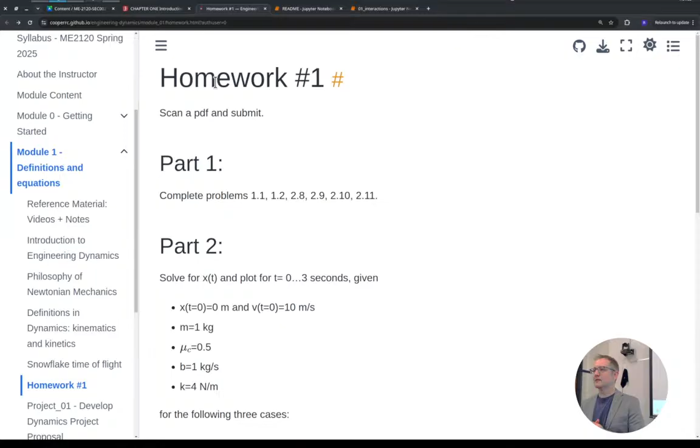Cool, ready for chapter 1, problem 1? Or are there still other questions? No, we're good? All right, we'll jump right in.

In the syllabus, and even in the reference material and readings, there's always a link to the chapters we're using. In this case we have chapter 1, chapter 2, and if you follow that link, since we're here on UConn campus, it'll jump you right into a PDF version of the textbook. So I'll scroll - I'm going to skip over the reading part and jump right into problem 1.

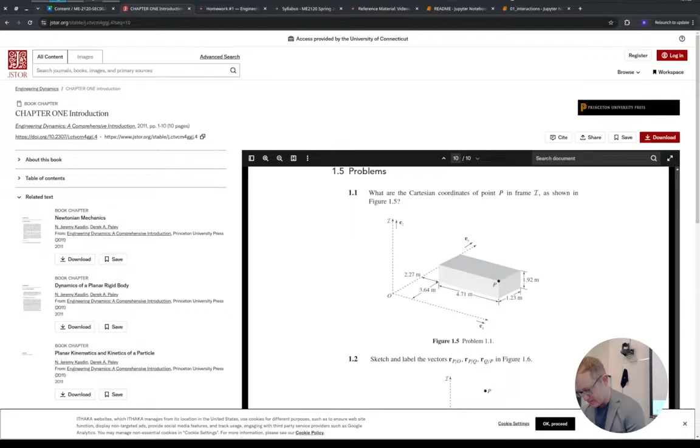I'll leave this kind of big. So in this problem, we have a coordinate system labeled for us, and there's a box sitting on that EX, EY floor, and we want to figure out where point P is. What kind of problem is this? It seems kind of static, right? It doesn't seem like a dynamics problem. So what are we doing here?

Seems like some geometric problem. Yeah, we're using geometry to describe locations and positions. So that general process is called kinematics. Here we're trying to define the kinematics of this point P.

And there could be cases where it's the same exact problem, but now the box is rotating. So we want to track point P, and we know where it is to begin with, but now it's spinning, so where is it now? At a different point in time, where did it go? So that's our first step: where is point P? How do we describe where that is?

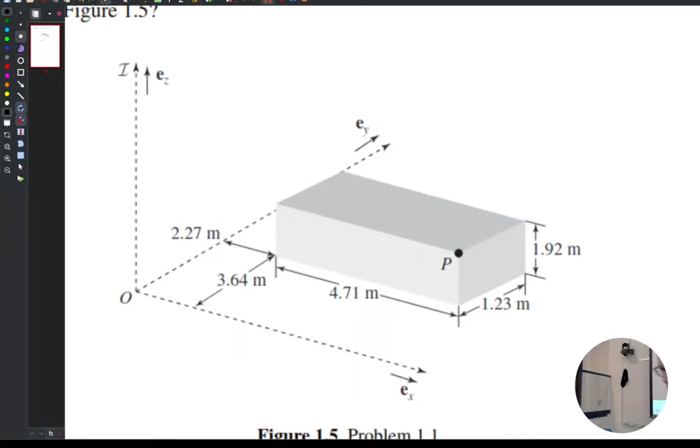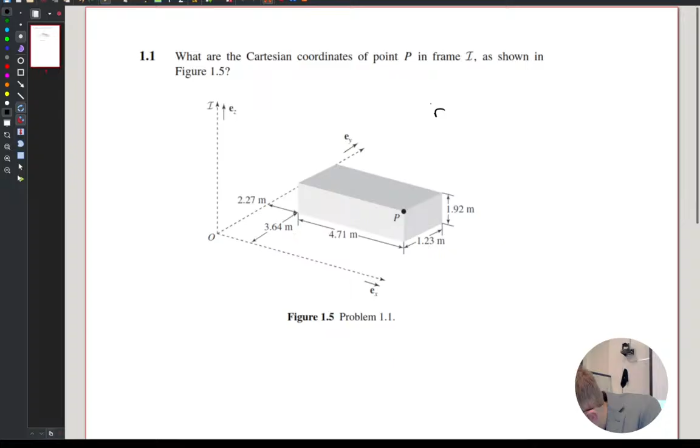All right, so most of the things that I've seen are kind of like something like this. What is that? 6.98. Saying that position P is these three coordinates, something like that.

Yeah. But also, we could say... have you seen this before, where you have like magnitude and unit vector added up like that? A little, some ringing a bell a little bit.

Are they different? Are these describing different positions of point P? No, it's the same. The vector is the vector. Once we say we're starting here, going to here, saying RP slash, really it's P slash O. So if you're saying RP, hopefully there's only one origin that you're talking about. So I'm going to write out explicitly that it's P slash O.

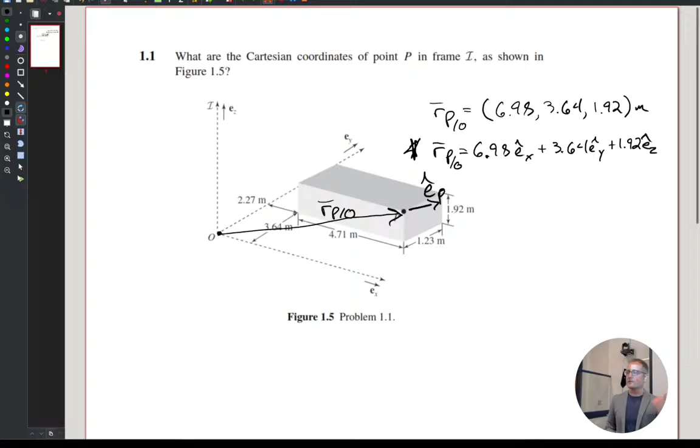We could figure out what this, I'll call it EP. There's a unit vector that points along that EP, right? We could take the magnitude, like its total distance from origin to point P, sum up all the squares, take the square root, divide all the points, and now we have a unit vector describing direction. And I could say RP slash O is this distance R along EP. It's still the same vector, just describing it along a different unit vector.

So that's the one thing I want to encourage you to try out: using that kind of notation more often, explicitly saying it's this unit vector times this magnitude plus that one times this magnitude. It helps organize where everything is pointing. Especially as things start rotating and moving, it gets easier to keep track of things.

Does that make sense? Was there a different approach? These were just the two things that I saw, it was like either parenthesis or something. I've also seen either brackets, like X, Y, and Z, or X, Y, Z, something like that. All of these are fine, but it helps to write out what coordinate system you're working in.

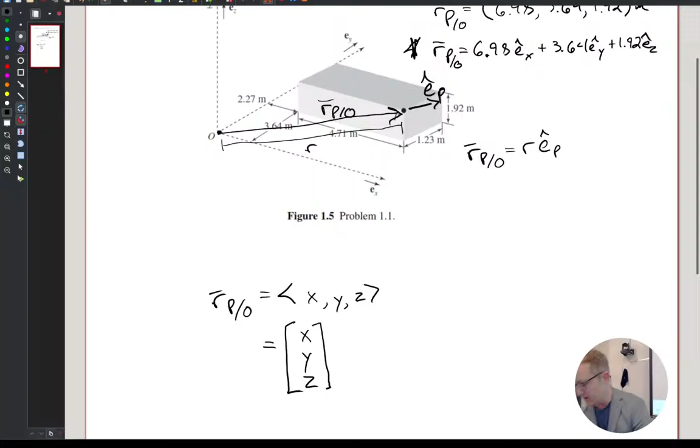And then even here, I would write out, hey, this is coordinate system I. So if I'm moving on the X direction, it's X along that I coordinate frame. Nothing mind-blowing yet, not yet.

So we just did our first kinematics problem. It's pretty exciting.

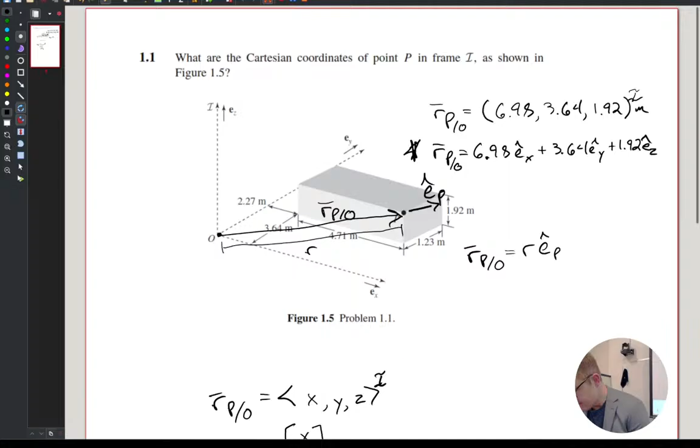Then I think, yeah, next one down here. Oh, not this one.

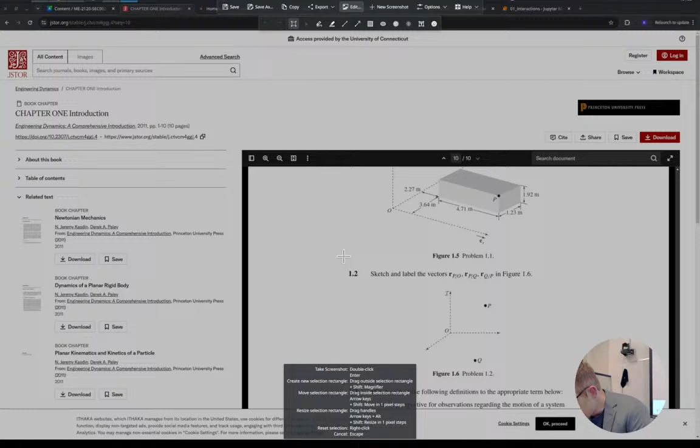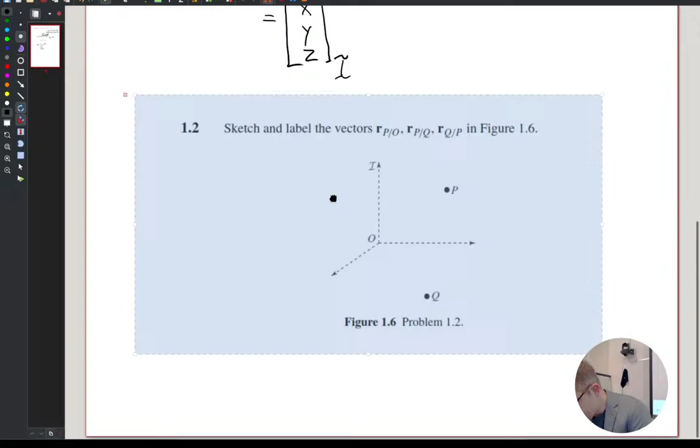So we want RPO, RPQ, and RQP. What do you think these are? What do those look like? And here we're trying to draw little arrows to represent what RPO, RQP are.

This one has all the right concept, but just the negatives. So the way to read it is the position of Q with respect to P. Yeah, exactly.

Okay, and you're doing this one's kind of like mathematics and geometry. If you have OP like that, which one of those vectors? Oh, I guess you do PO. Okay.

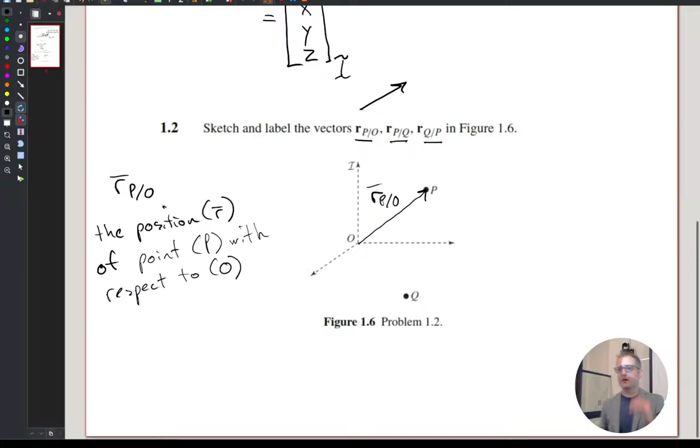the position R of point P with respect to O. That's what this notation means, and yeah, mathematicians and physicists love to condense everything to the point where it's almost unreadable, but that's what this quick notation means: I'm looking at where is point P with respect to point O.

So you write where you went and then where you came from. All right, cool. So then we probably have, let's do a blue. Probably have a good handle on this.

Which one is red, the P/Q or Q/P? What do we think? Who says the red arrow is P/Q? Yeah. P/Q. Yeah, it has to, it takes a little bit to readjust. All right, R of P/Q.

Cool, so then the other one has got to be Q/P, right? At least I would think so.

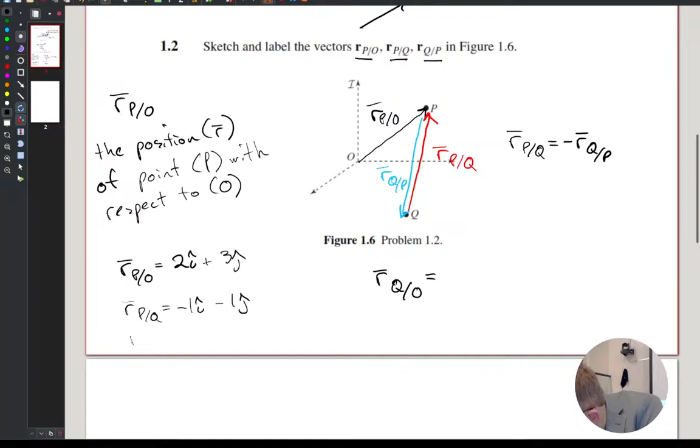RP/Q is negative 1i minus 1j. Let's say I know those 3 vectors, like I have the values, I measured them. Is there any way for me to figure out what RQO is? What is RQO? And here I simplified everything down to 2 dimensions, it's easier for me to work that way. What is RQO? Is it related to PO or PQ or QP, any of those?

You find the coordinates of Q from P, and then do that from P to Q. Okay, so what would that one look like?

Let's draw. So in this case, I go 1, 2, 1, 2, 3. P with respect to Q, so Q to P. So 1 and 1.

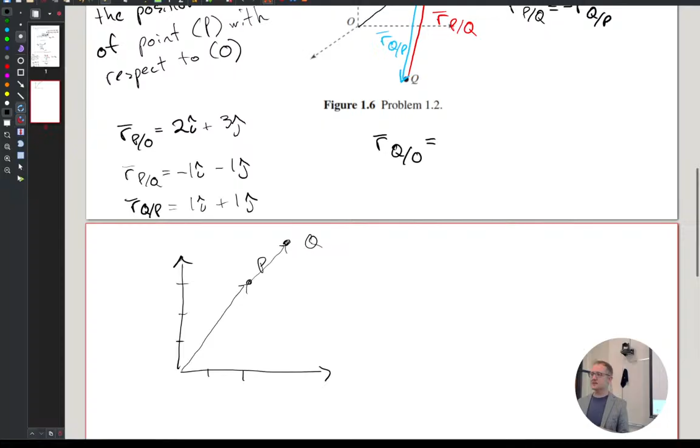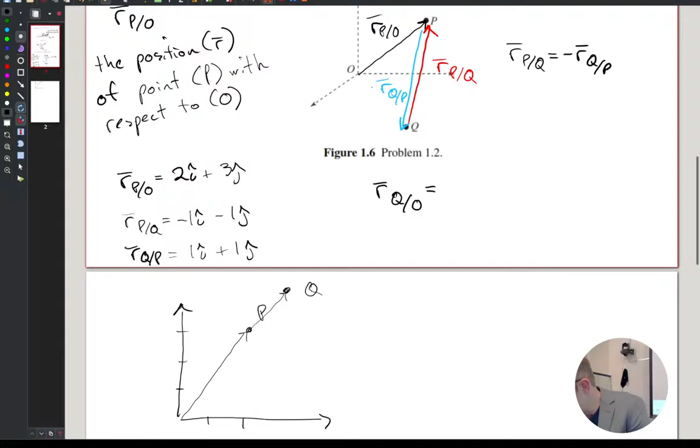Distance, yeah, if we want total distance. And this was what I was wondering if you've seen or used before, but if I already have these vectors, I can go tip to tail and add them up to get to that other vector. So this R of Q to O is R of P to O plus R of Q with respect to P.

So in this case, I could say that R, in this little made up example, R of Q to O is 2i plus 3j plus 1i plus 1j.

And they're all magnitudes and unit vectors. I can add unit vectors to each other and it's still the same unit vector. So in this case, I would have R of Q to O equals 3i plus 4j, something like that. But if I'm adding vectors up, I can add the magnitudes along the same direction. That's what I was trying to get at there.

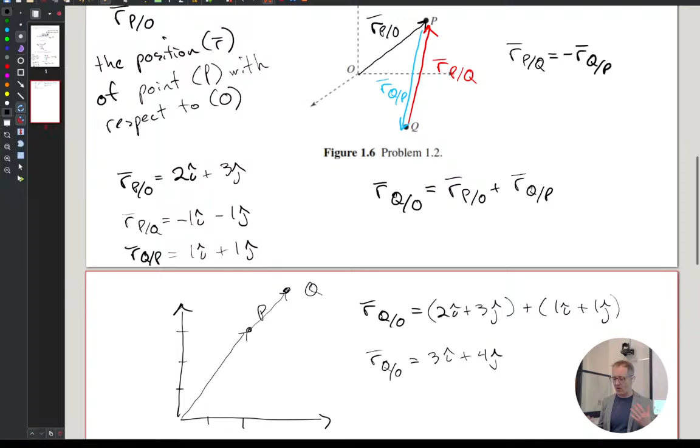This one, you're not actually asked to do this in the homework, but I'm just trying to gauge where we're at versus where we're going with stuff. We're going to need these relative positions, relative velocity, relative acceleration, all these terms. It's the same kind of vector formulation like this.

Cool. If I know position of P with respect to Q equals negative Q with respect to P, so position of P with respect to Q is the same but opposite as Q with respect to P, what about their speed? What about their velocities? Do I know anything about the velocity between them? They're equal and opposite.

Why do they have to be equal and opposite? Because you multiplied by -1 to get the other one.

This one, yes. Sorry, just if you guys see a chat pop up, let me know.

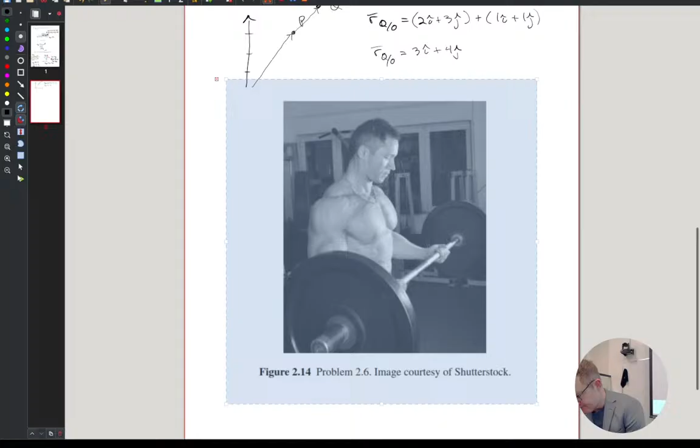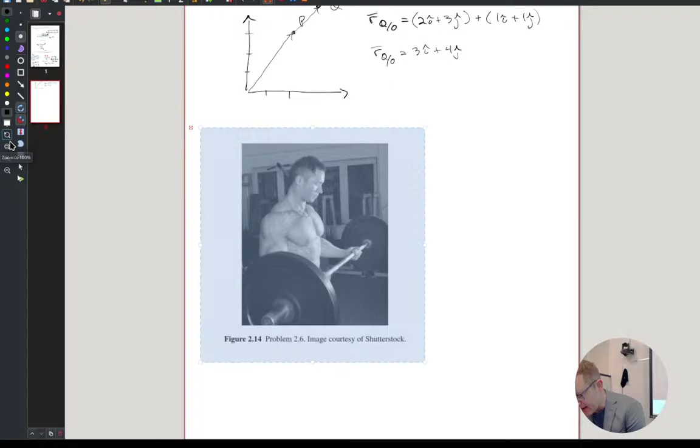Big. So I know it's tempting to draw the eye candy, the big muscly guy in this case. But the problem that we're trying to, oh, not that one, trying to get here.

The problem that we're trying to answer is draw a free body diagram of the barbell. So not the hulking, shirtless muscle guy, but just the barbell, the thing that he's holding. It's like, really, we need a mask over that.

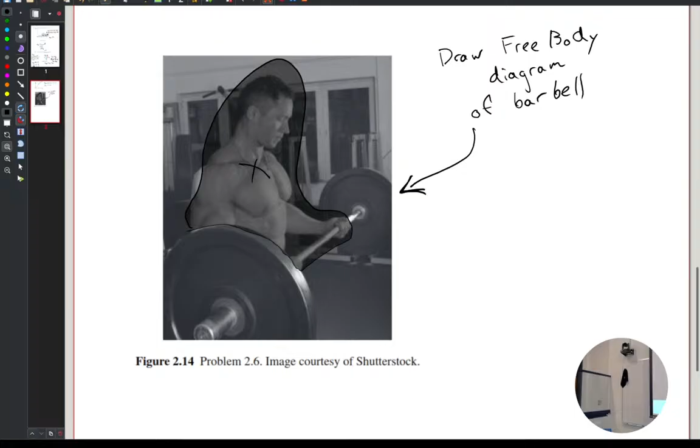All right, so I'll draw. There we go.

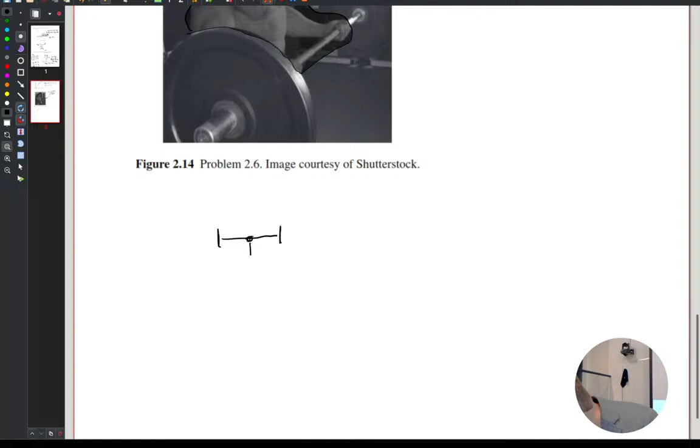Yeah, next week. So we still have time to go through the rest of the problems.

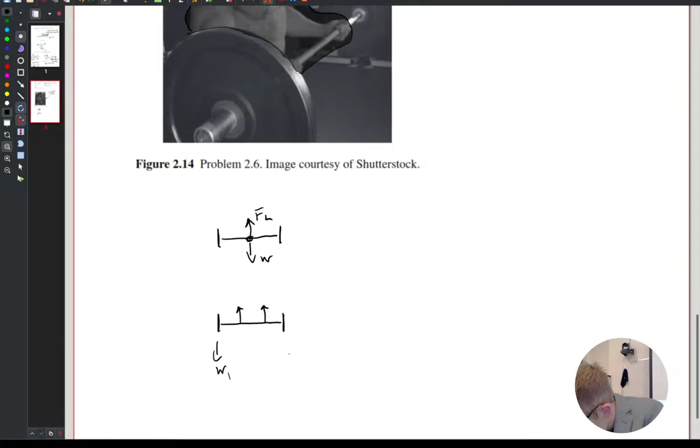What was the other thing? I saw something else. Oh yeah.

Did anybody have something different than these? I didn't see everybody's free body diagram, but were there other approaches that you were thinking about?

I just feel like a big force of gravity going down the middle, so just the center of that. It'll take a second, it'll catch up. So just one weight pushing down?

Okay, so nothing—so the weight, this would mean that the force of the lifter, I call it FL, is 0. What happens then? There should be a normal force going out against gravity. Where is that one coming from? It's coming from the ground, stacking into it.

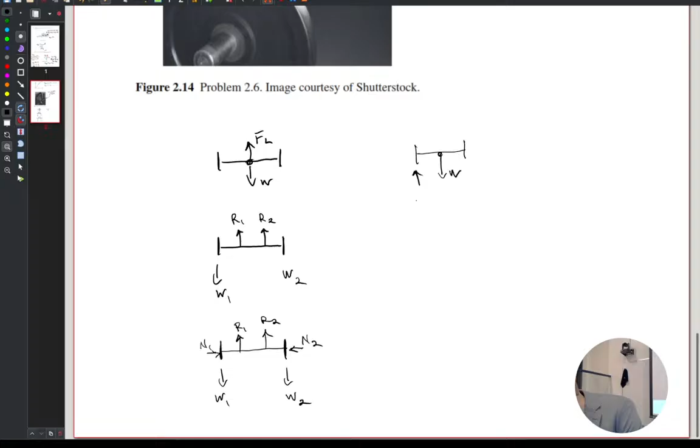Okay, so if the lifter puts the thing on the floor, then the barbell is sitting on the floor, and we could say—if this barbell is in contact with the floor, then yes, the floor is applying normal force.

But if the lifter is holding the thing—we were talking about this a little bit, there's definitely momentum. It's hard to lift things, and it's hard to lift them faster. Well, it depends, right? If it's already in motion, it's easy to keep it in motion. But if you're trying to accelerate the thing, that's extra work, extra force needed to accelerate it. But the forces you can apply, there's still only this.

You're still limited to one resultant force up. You can add them together, or keep them separate and look at how one affects the other, but you're limited in how you can apply the force—unless you're also using feet plus hands, trying to juggle this thing. If you're changing how you're holding it, then that's different.